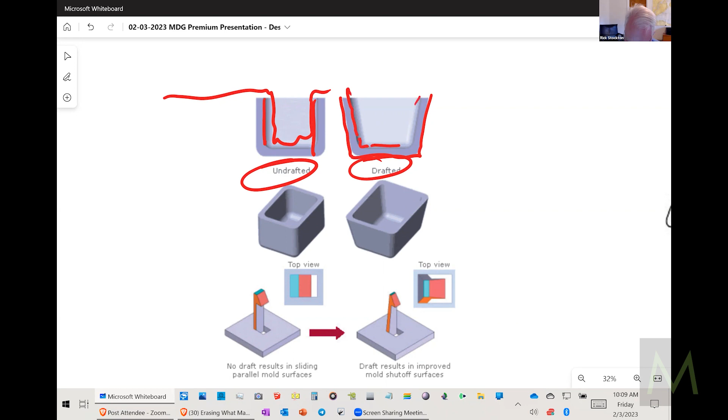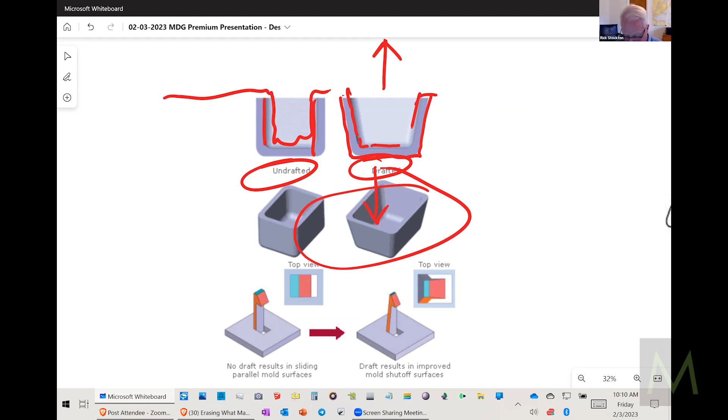And that makes it really easy to just fall out of the mold. The top part that's making your inside is made like this, so you separate—the top part of the mold goes this way and the bottom part goes this way. This little guy drops out, and it's terribly easy to explain.

What we started running into, though, were some more complicated situations. If you're looking at this, some of you will say, oh, you just have to do this. We understand we're changing an angle here, doing something here, something resultant there. There are even subtle changes going on down here, but you notice you still get pretty much the same thing—just a few little subtle changes.

Now their complication was they had layer after layer after layer of parts—one part had to fit into another part, which had to fit into another part, and so on. The problem was that by the time you started putting these little angles in, by the time you got to the one at the top, everything had changed. So we had to do a lot of subtle little design work, and it's all geometry.

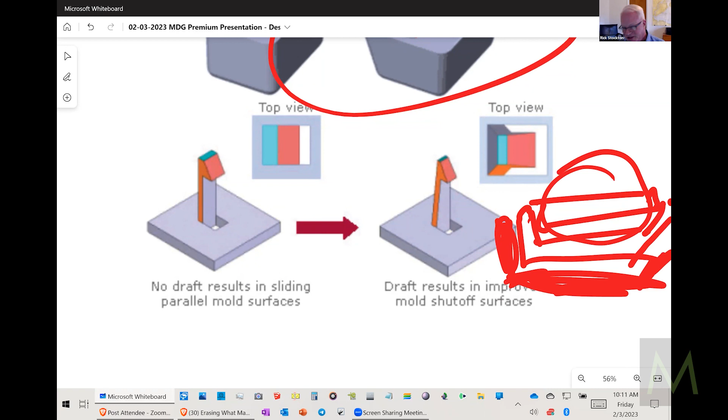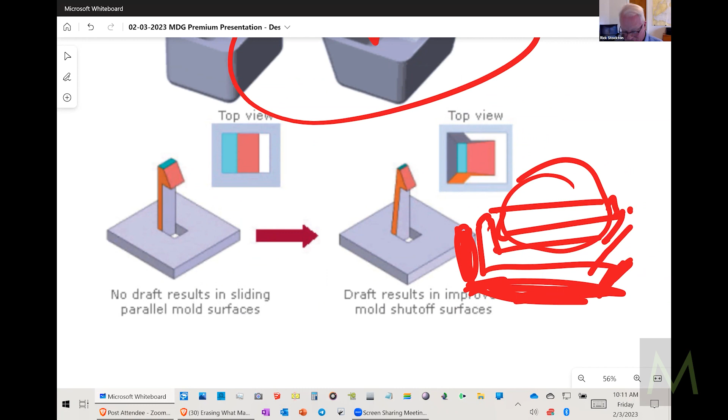Even though calculus is still pretty opaque to me, geometry and trigonometry and algebra—that's just what I did. If you have those tools, this stuff becomes a snap. And if you have 3D technology, it actually gets fun.

We used to have all this stuff to do. So these are the kind of things—this is the simple explanation for what these guys are running into. What I'd like to do now is take a quick walk through some of the disciplines you're all involved in, and how design for manufacturability looks from your view.

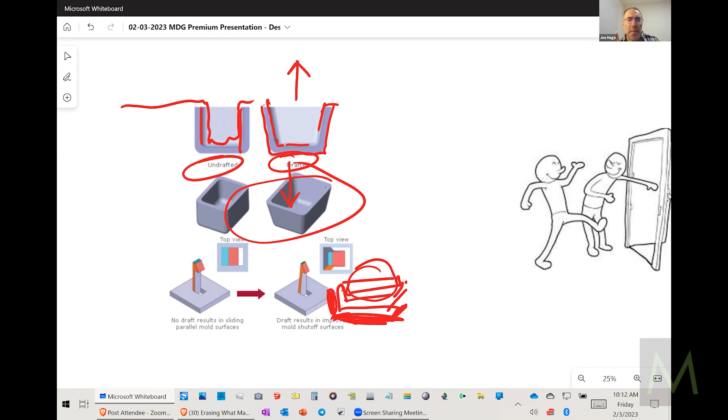Let me ask you, Rick—you started by saying no one would give a quote to work on what you just showed us, something that seems relatively simple? Well, the parts—they had a bunch of parts maybe a foot long, and the framework might look something like this. And they all had to snap together, latch together, with little spring latches and hinges and things like that.

And they had all this stuff going on, and the individual parts all had these straight sides everywhere. You couldn't—if this was like the cross section of a piece that was going along like this—

Is your point that had they made the change you show on the right, they would have gotten quotes? Yes, and actually we did make those changes and they did get quotes. Oh, okay, I didn't catch that entirely—now I understand, it was a simple fix if they understood.

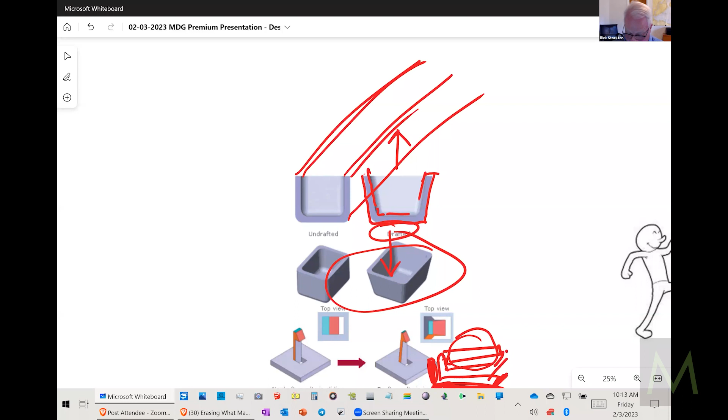This is why, as many of you as want, keep your mics on—unless you've got a dog barking in the background. Then I'll want to meet your dog, and I'll get completely lost track of what I'm thinking about. But it was tiny little changes like this.

You'd be amazed—sometimes it can be a change of material, sometimes something else. Imagine if you had a piece that had to snap into, let's say, this design, and then another piece that had to snap into this piece, and another piece that had to snap into that one—sort of a Russian nesting doll situation.

And you had to change this one—well, it wouldn't fit the one that has to snap into it anymore, and the other one would be even worse. By the time you got to the fourth layer, the latch or the thing you stick over it all, everything's completely gone. It's like the telephone game, where you whisper something in someone's ear but don't quite get it right, and then that guy whispers it into the next guy's ear.

Then he whispers it in her ear, and they all get it wrong. By the time you're done, God knows what you're going to end up with.

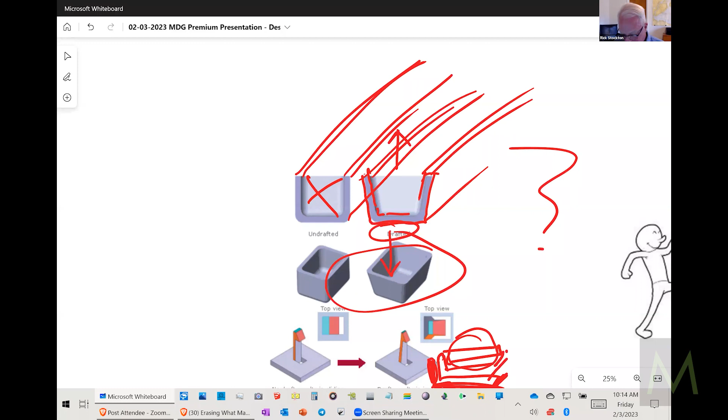All right, take us through that door. This door is into the weird door of how things go on. You get out into a manufacturing line, and it almost looks like somebody got up in the morning and decided they were going to completely ruin things. But nobody does. Everybody gets up in the morning trying to make the world a better place, trying to make it all work, wanting to make a contribution. Everybody wants to be the hero, and everybody should be. However,

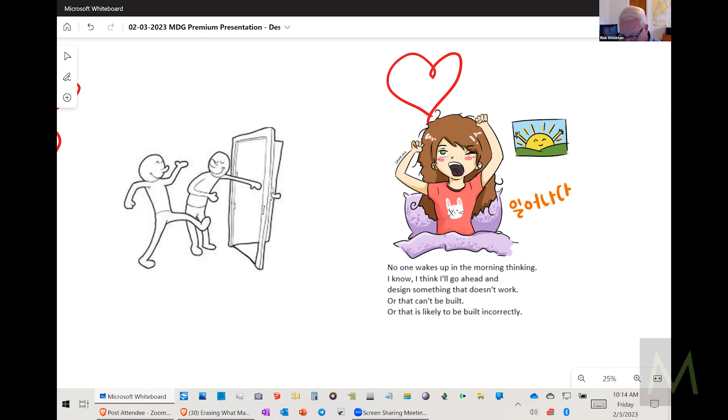Sometimes things don't go right, and sometimes the effort put into a design goes wrong. Elon Musk remarked one time that most of the effort put into one of his rockets was in manufacturing. I caught this on LinkedIn, and it was a big thing, everybody arguing, and all the designers like me are going, 'Oh no, it's really the design.' The answer is it's both, but he's absolutely right.

The art of making things work is actually all in the manufacturing. So if you're on the design end of things, it gives you an obligation, not just to make things work, but to make them likely to work, not just to make sure they can be assembled, but to make them likely to be assembled. Now you're thinking not just in physics, but in statistics, and in human beings and how they work.

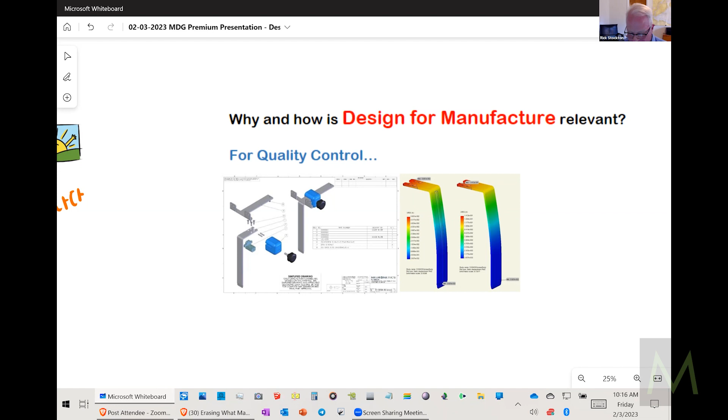For quality control, this is a very simple drawing. If your drawings are laid out in such a way that anything's unclear, that you've got dimensions that can't be measured in the real universe, and you've got things that... actually I would have thought of it if I could have, but I missed it.

We actually had a pacemaker can—it was actually a neurostimulator—but what we had was they very cleverly laid it out, and okay, it's nice and flat. So the way it was laid out in the drawing is a radius, and a radius, and a little one here, big one here. Again, this is all in the area of drawings and how being able to communicate at the beginning helps people at the end.

It just so happened that the guy who was installing our optical gauges was hanging out with us, installing something new. We were showing him this and how we couldn't measure it twice and get the same exact reading every single time. And we couldn't—everything was different every time you measured it. He looked at it, scratched his head, and said, 'Well, of course it's not going to work. You're going to get a different measurement every time.' And we said, why in the world is that?

In our world of linear thinking, you just kind of want to go, well, if you measure it, of course you'll get the measurement. He said, because it's impossible. Whether you're using touch or optical, you're getting a series of readings, and no matter how close they get, they're going to be a little different every time, giving you a different result, a different calculation. He said, you have to go at least two-thirds around a circle to get something that's consistent. I said, no way. He said, way. So I said, show me the math. And he sent it to me.

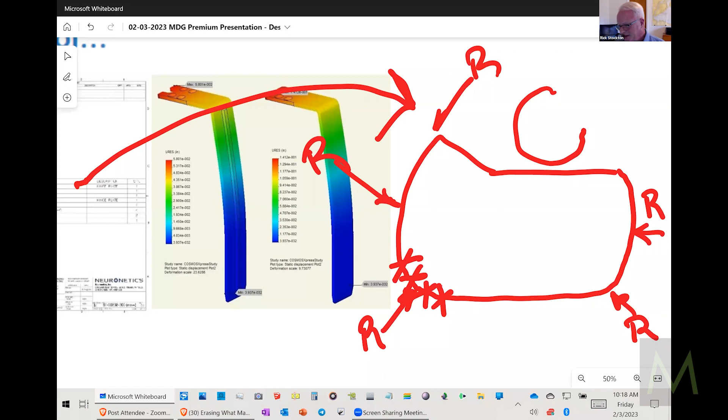The man was right. But the guy doing the drawing, if this radius was important and he's designing this part, just labels it like a radius—he says this is the radius of 0.060 inches or something like that. It's useless; no one can measure it. This affects quality, and if you're not designing well, it affects quality control. Quality control basically had to resort to making a bunch of these cans, test fitting them together, and pronouncing it okay.

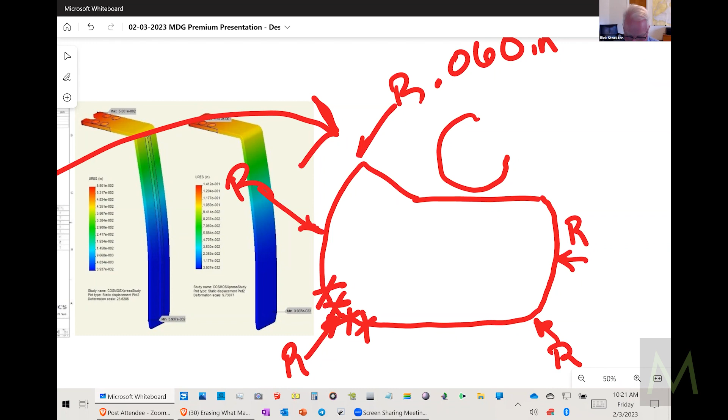If you've been doing this for a while, I'm going to give away my age. When I started learning to draft in 10th grade, for years and years, the standard of drawings was pencil and maybe ink. Our idea of automating an assembly was making a Xerox copy of it on transparent paper and then taping it right next to it. That's what we did, that was cut and paste. We did that for years and years. Then I sent myself back off to school to learn CAD, and I joined a company where they were going to teach me what I didn't know. That was our standard. There was a lot of stuff that was so hard to do if you didn't have CAD that it wasn't worth designing.

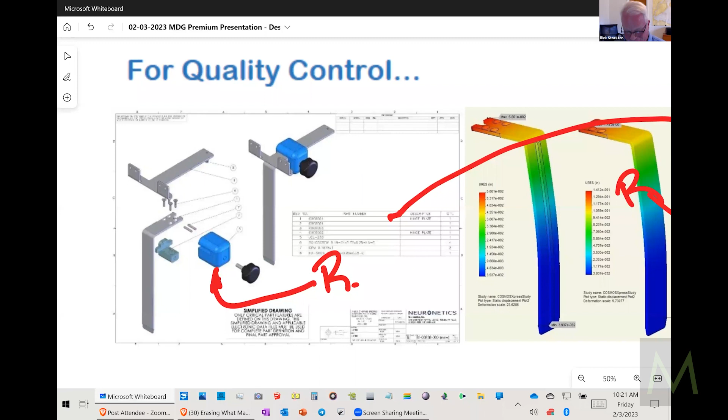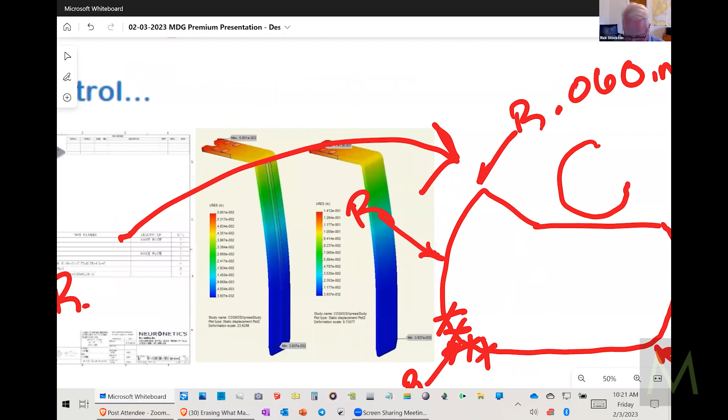But we had to use a lot of imagination back when there was pencil. You also have to do that, as you guys just pointed out, when you're working with something where you can design impossible things. And the big issue with us designers is that we design impossible things. Even in packaging, I get weird things where I might have heat or radiation exposure, and that changes my tolerances and fits, and I have to account for that. You're not going to get that in a 3D printed item either.

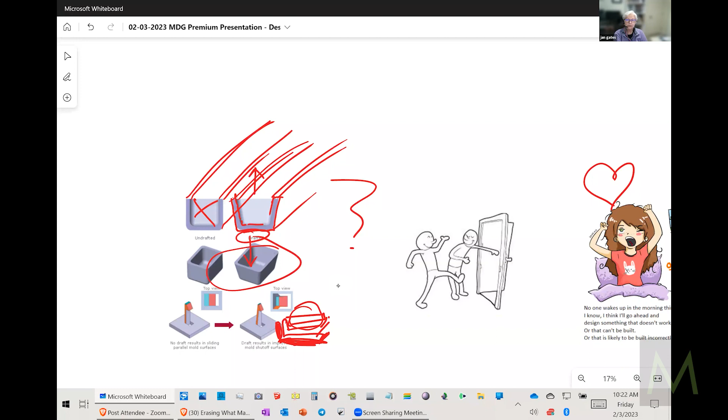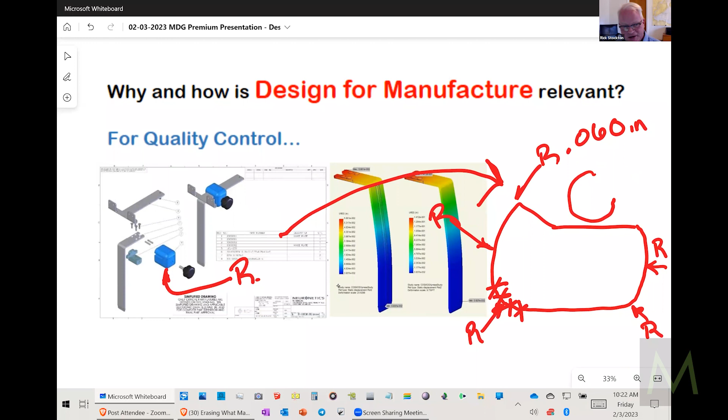So it makes it fun. Not only that, but skill levels vary among CAD designers. I remember one time, half for fun but also because we had an application, I actually made a CAD design of a Ziploc bag with the flexibility, because we needed to portray something photographically, so it's got open and closed and various things like that. But even when you've got all the skill that you need, if you're not pretty much seeing in 4 or 5 dimensions at once, you're gonna miss this stuff.

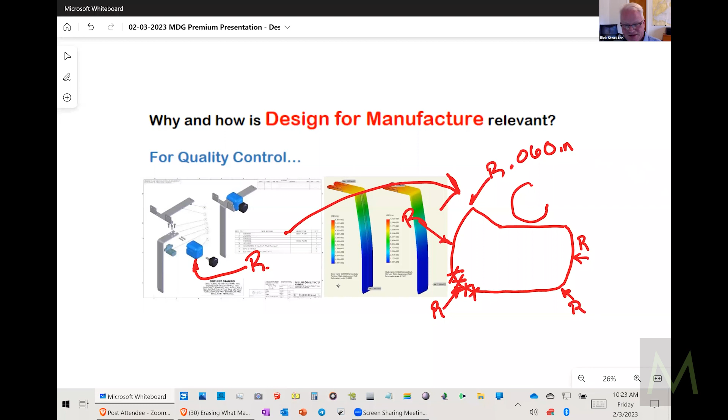So what does it look like? Luke, you had something to add?

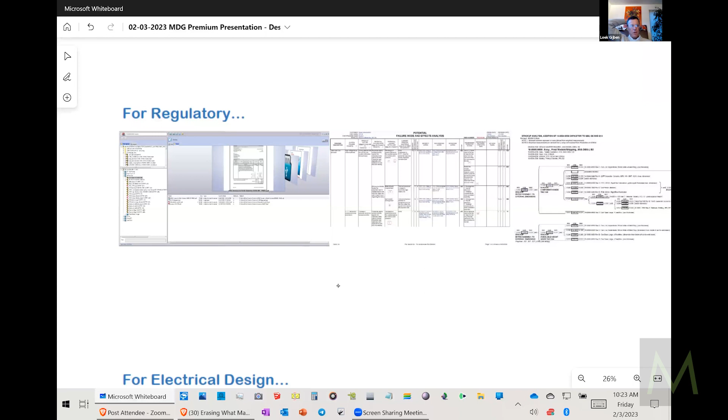Right now we're doing a process failure mode and effect analysis on the process of building a product together. It has 7 parts that have to be glued together, and it's almost impossible to validate because the work instruction says you must have the right amount of glue, it mustn't go over the edge, and you must have enough glue that it sticks, but not too much that it will get in the way. The only way you can validate that is by qualifying the people who are doing it, so you teach them how to glue.

Absolutely. Nelly? So I actually have a client, and I won't name drop or anything, but they're doing 3D printing, and they're like, well, to design and mold right now, it's just too costly.

We're going to go to clinical trials with 3D printing, and you haven't even considered how you're going to manufacture for the quantities you might need. But they don't want to hear that because they've successfully gotten to a point where they can do the 510K with this. If you switch to molding, don't you have to do an update, because that's a major design change from 3D printing to molds? I totally understand designing for manufacturability, because when I question them on processes, they're always like, well, this works right now. And I'm like, yeah, but have you worked in a manufacturing environment? Do you know what that's going to be? I worked for a company where the cost of manufacturing the device was so high that by the time they shipped it, we weren't making money, and we hadn't even paid sales commission yet. You've got to consider those steps.

If they make a change to the design that's significant enough, they'll have to redo their whole clinical study too. They always ask, what version did you do your clinical study with, and then look for reasons why you need to repeat it.

I actually have a client who is shipping product with 3D printed components in it, which I told them wasn't good. So now they're in a redesign, and we're designing all those parts out of 3D printing, because this isn't my specialty.

So are you suggesting that 3D printing has too much tolerance or variance and can't be relied upon? Or, in the spirit of today's talk about design for manufacturability, are 3D printers being used to mass produce anything, or is it more like a design tool? I see it more as a design tool. There are certainly cases where 3D printed parts are final parts, but again, they have to be validated, proven to have repeatability and all those things. Most 3D printing systems aren't really designed for that.

I think it is possible, of course, and there are situations, like in aerospace, where they do certain complex duct work, but that's very much controlled. Each part is tagged, labeled, and validated. So it's not like that in a medical device. As a general rule, I'm sure there are exceptions, but your standard 3D printed plastic parts are just problematic.

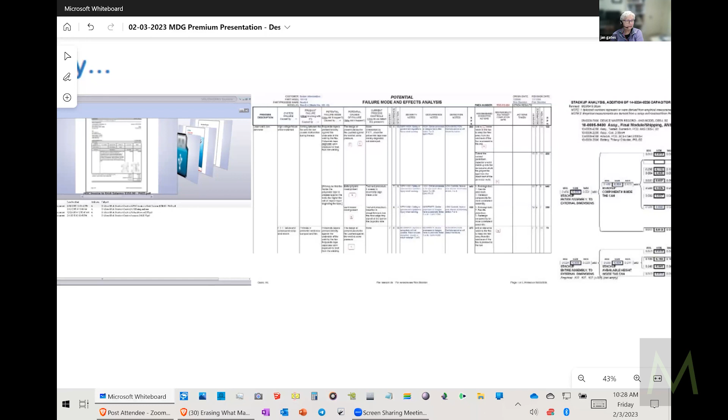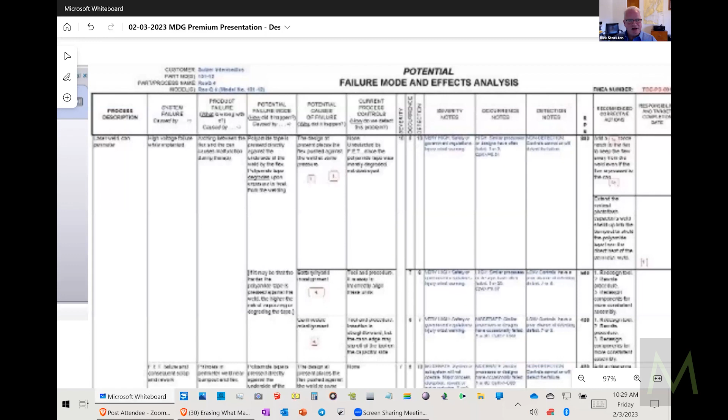The interesting thing about that is Luke was getting into this. When you're doing FMEAs, the whole process of evaluating how a process is going to go depends on what that process is. If we're used to talking about drilling or turning down metal, or even injection molding, and now we're talking about another process, which is additive manufacturing, our old 3D printing, that's going to have some different considerations, and the whole process changes based on that.

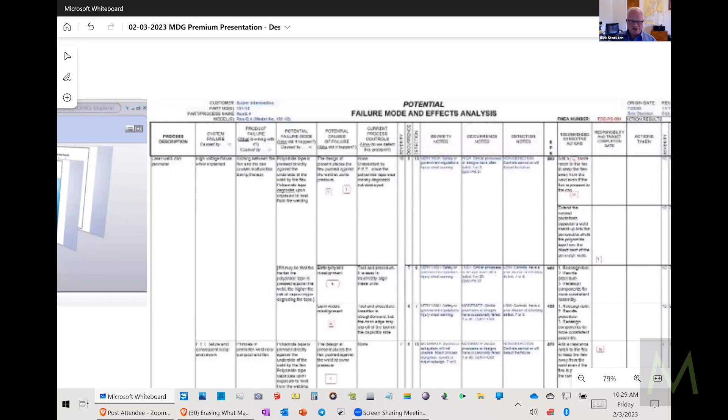I was brought in for a few weeks one time because an automotive accessory company was trying to put an FMEA together, and they had their 17 most technically expensive people in a room for hours every day, and it was miserable, like torture. So what I did is I came in, asked them a million questions, went home and did that much of the FMEA, came back and did it again. In 3 weeks we were done. It was only an hour, twice a week, and we got it done.

But the thing is, if you're not doing this kind of evaluation, you can easily run into something similar to that situation.

And how does design for manufacturability affect that? All kinds of things - even the ability to maintain relationships between your parts and understand what's going to affect something else, to say, let's experiment with something else. Also the ability to do stack-up analysis easily. If doing a stack-up analysis is hard and time-consuming, if doing an FMEA or risk analysis is hard and time-consuming, it's a fantastic time to get help doing that.

But you guys are actually now getting 3 sections ahead, so I'll just throw this at you too. If I had a crowd of high schoolers, they'd still be texting each other. Anyway...

For electrical design - this is the very first thing I ever designed. It was a turn-of-the-century internal power source with capacitors and batteries and the whole nine yards for a left ventricular assist device, basically to keep somebody alive until they could get a heart, while still letting them run around, take showers, things like that.

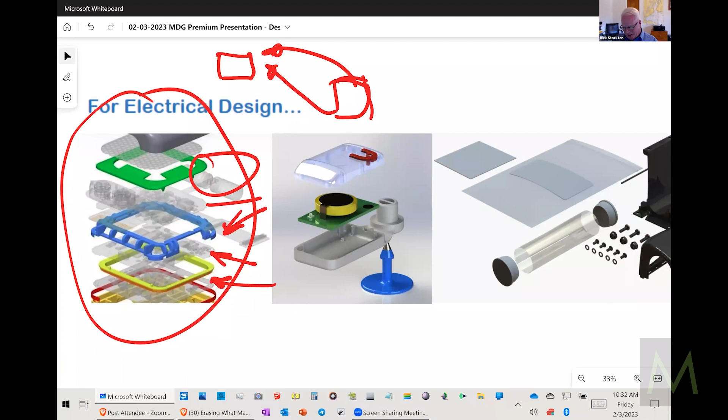If I do get a chance, I won't dwell on this, but I'll bring up something - if you were alive and watching the news in 1986, the entire world saw this disaster, but they didn't see the design for manufacturing failure embedded in it that caused the entire thing. Nobody has seen that part.

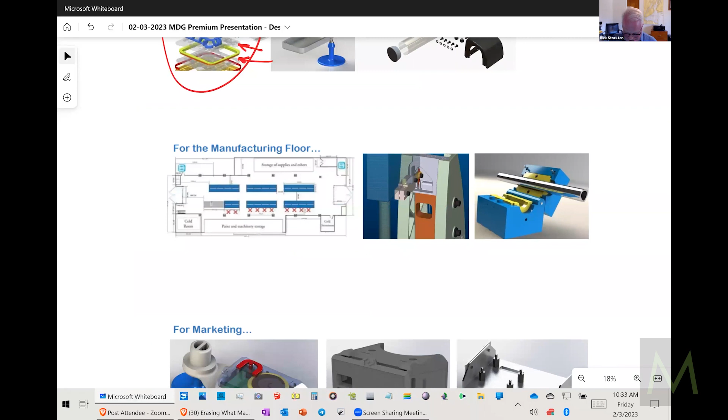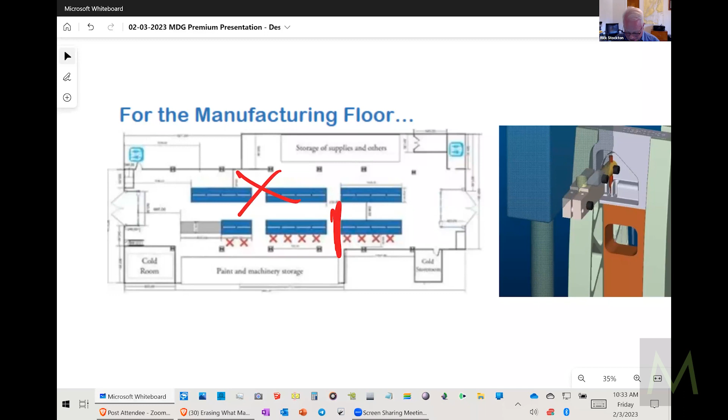So when it comes to your manufacturing floor, if you design something so that the build is logical, so it can only go together one way - the Japanese call that poka-yoke - it makes sense to put it together a certain way. It takes a bit of extra thought in the beginning, or design it so it won't go together unless it's correct, also poka-yoke. If you can do that, you can avoid things getting stopped, destroyed, and reworked at various points along the production line. You can keep those kinds of problems from happening to you.

Michelle? Oh, go ahead. I'm having a little bit of PTSD here. My first recall ever was a combination of about every single thing that you've talked about, short of 3D printing, because it wasn't around then. Oh my God, we're not done.

But yeah, the parts were designed and the stacking tolerances were loose. They were supposed to be press fit parts that couldn't stay together. The drawing allowed flash at the mating surfaces. Then you take those two parts that are supposed to fit together and send them to the assembly line, and their solution, rather than fix the mating surfaces and the flash, was to put a fixture on the manufacturing line to check if the fit had locked or not.

And then, fast forward, they're trying to validate the mold in a new press. It's supposed to be a validation run of 8,000 parts, and they overran it by 28,000 to fill inventory and release them to build before the validation was complete. And then I have 28,000 resuscitators that fall apart in the field.

And then somebody in planning who had started this whole thing growing came into my office one day, and I was super stressed out, and I probably snapped at her, and she's like, you know, you used to be really easy to work with, Michelle.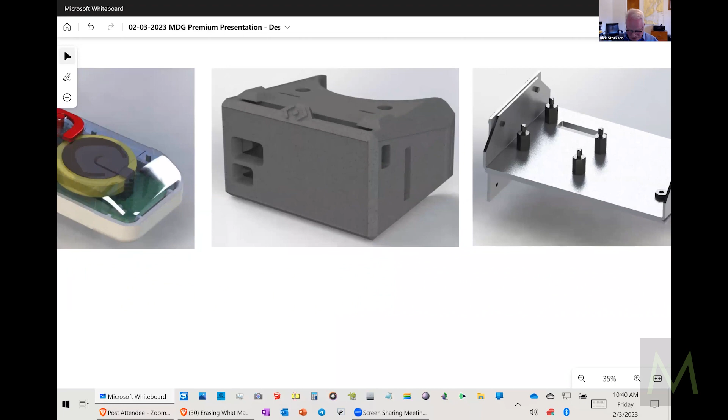However, it's also nice if you know how things are going to go together ahead of time. You can also make these great pictures of them that they can put in some of their things.

Purchasing, we looked at a little bit. And when you're looking at purchasing, it's just like, well, okay, so what's wrong with purchasing? You just sling it over the wall and the purchasing guy gets it. Well, what if the stuff you sling over the wall can't be built? What if it's unlikely to ever be built well?

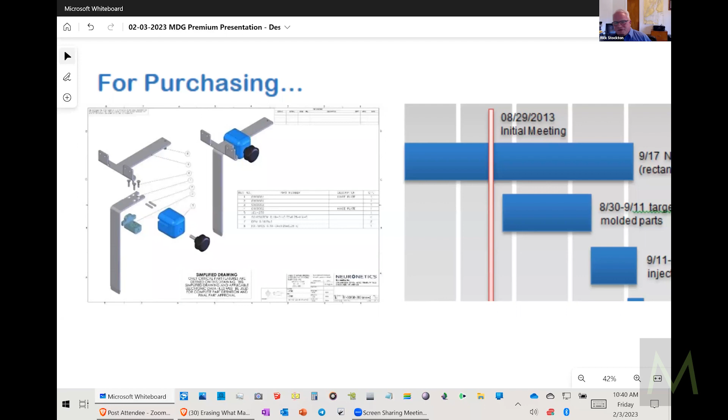What if you put a little more thought into it, you could have made it cost half as much, which means if it's a medical device, maybe more people will be able to get it in their insurance plans. What if you have something that can be made so inexpensive that it can be put on a credit card?

I know a guy in San Antonio who's doing it with the artificial hand. I've consulted with him for free because I love what he's doing. And he's doing one for a fraction of the cost of an artificial hand, and we're talking heat sensors and everything else. He's got it built in, and he's almost got it ready to go.

And what if you can do something? What if $10,000 of thought on the beginning end can save you $700 million of thought on the back end, and something that only could have gone to the very, very rich can now be afforded by anybody and can go on anyone's insurance plan. And that is like the goal.

I work on as many things as I possibly can that make sure that the thought goes into it so that things can get to everybody. I know we can't afford to give everybody the most expensive thing in the world, but what if we can put the thought into it to make as many things as possible affordable for everybody, even if they drive a bus, even if they dig holes for a living, even if they don't do highly technical things like all of us do.

But if you've seen production delays, you've seen things fall short, you've seen the manufacturing guys coming back saying we can't build this. What does that do to production schedules? If you want a reliable production schedule, put enough thought in beforehand into the design. Don't just be thinking in tolerances, be thinking in statistics. There are a lot of skills that are going to go into making sure that a lot of these things happen.

But I'm going to throw a specific out that doesn't have anything to do with medical devices, and you'll be going, how in the world is Rick going to stretch this out from this and turn it into a manufacturability issue? And of course, I'm going to talk about the Hyatt Regency walkway collapse.

Here's what I'm not going to cover. I'm not going to cover the hours that we talked about it in civil engineering, going through the mechanics of actually how it collapsed. I'm not going to do it. I'm going to show you some pictures, no dead bodies, but it was a disaster.

You can see here, there was a sky bridge held up by cables like this, basically big steel bars. Okay, now, spoiler alert, the steel bars were strong enough. Other spoiler alert, that even though they did 1,000 things wrong, the design was strong enough.

So how'd this happen? How'd they fall down during a dance and kill hundreds of people and produce the second biggest life loss disaster in the United States in 1981, which we all got analyzed like crazy in civil engineering in 1982 and 1983.

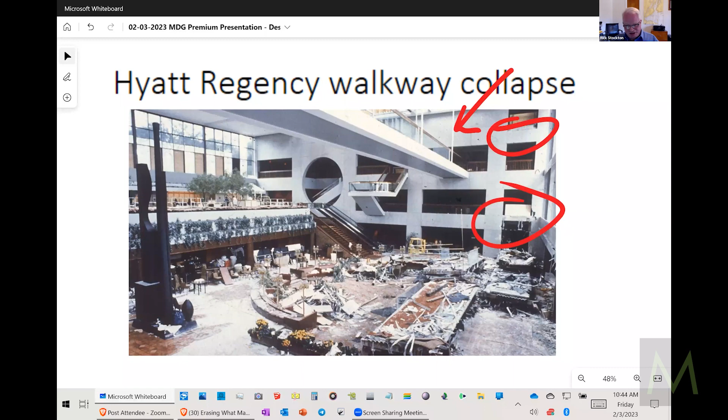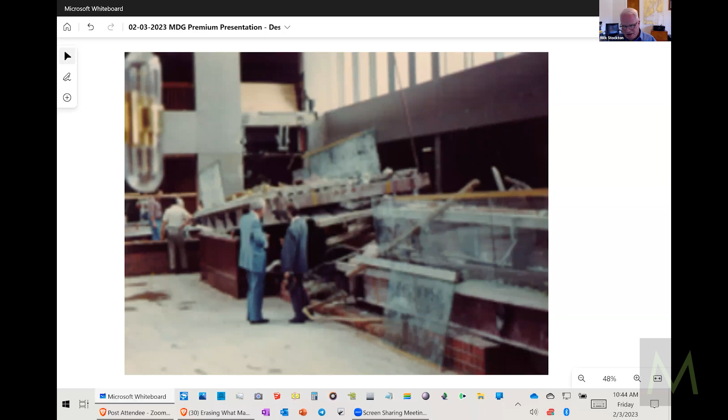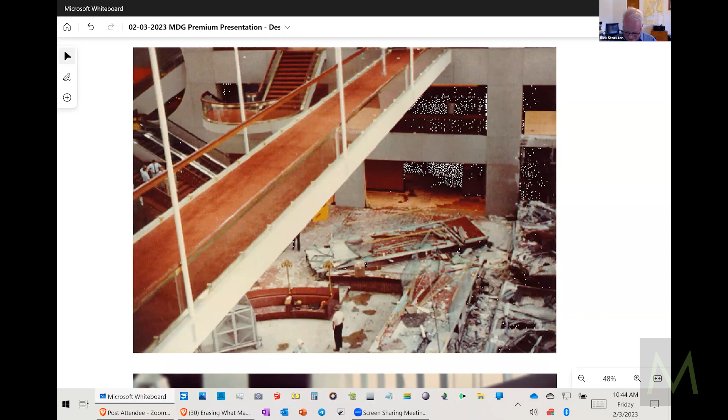It was just a disaster. This is when it was all working. You can see these huge steel cables hanging down. Here's somebody walking across. It was perfectly secure. Here was another one. So we have, starting from the bottom, 1, 2, and there's the third one.

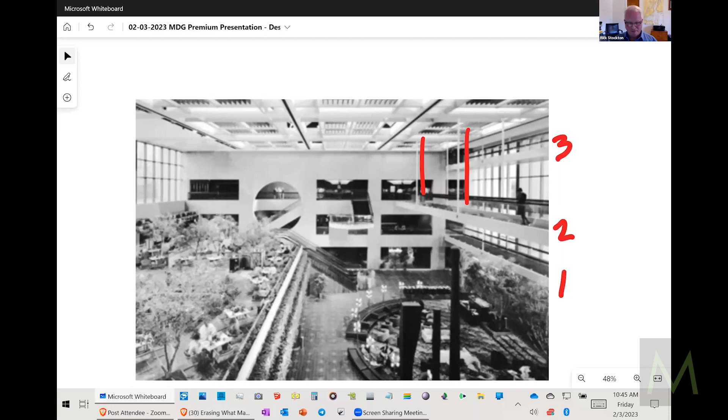I'm also not going to get into all of the different things they did wrong. They had design changes going around as handwritten notes, phone calls, word of mouth, no design changes, no verification.

Anybody who has heard me knows we all love to criticize bureaucracy. We all love to criticize paperwork. If we could just cut the red tape, everything would be fine, everything would be great. Well, if you're going to cut the red tape, you better just get ready to be gone. Because the guy who was the head engineer designing this stuff spent the rest of his life, no one went to prison, but he spent the rest of his life touring the United States, trying to warn people about all of the horrible practices that went into this.

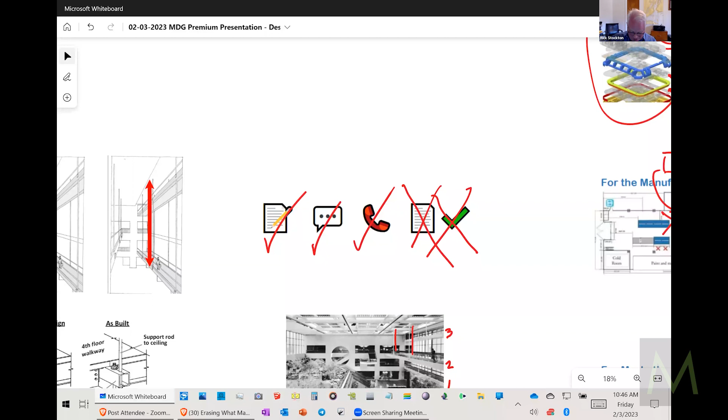So, again avoiding a bunch of detail, because we're going to get to the weird part that nobody saw. When they built this together, it was supposed to be a support that went all the way to the bottom. And again, real strong. What happened?

Well, this is all threaded. This is all threaded material before it's covered up and looks all smooth. But it's all like a gigantic all thread, the biggest all thread you ever saw, right? And these are all secured by nuts, which were also strong enough, into plates, which were also strong enough. They looked like they were probably designed with a safety factor of 2 or 3, but oh well.

Anyway, they went all the way up here, and somebody said, do you know how long it's going to take? Because nuts were going to have to go here. They said, do you know how long we're going to be screwing to get these nuts screwed all the way up to here for like 20 different supports? It's going to take forever. It's going to slow the project down. We're going to lose efficiency. And I'm all for efficiency.

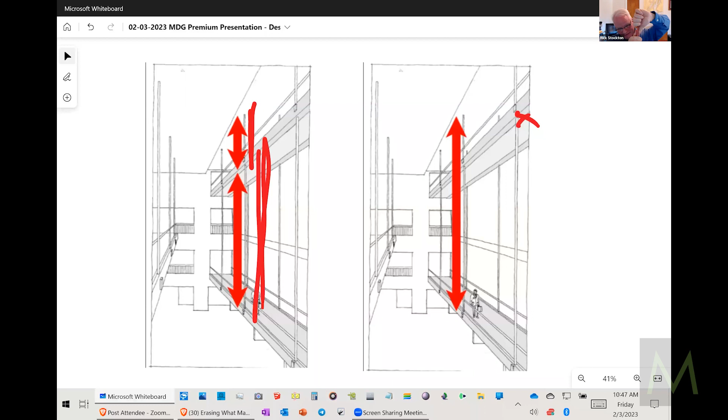But through a series of deviations from plan, they started doing it like this. They had one that was this long and one that was this long. And I could look at the last Aggie bonfire, and I am a proud Aggie, I suppose, but instead of having a single center pole on the fire, they didn't have a long enough tree, so they had 2, and they spliced it together. Where did they splice it together? Exactly in the weakest point of a supporting column, the center. And you'll just have to take my word on that if you didn't go through all the mechanical engineering classes.

And here's the close-up on what they did, and I'm just going to kind of zip right through it if I can. This was to plan. This was the way they did it. Now it was much more convenient. It was much more quick. They got to use shorter pieces, and it put exactly twice the strain on these welded box beams.

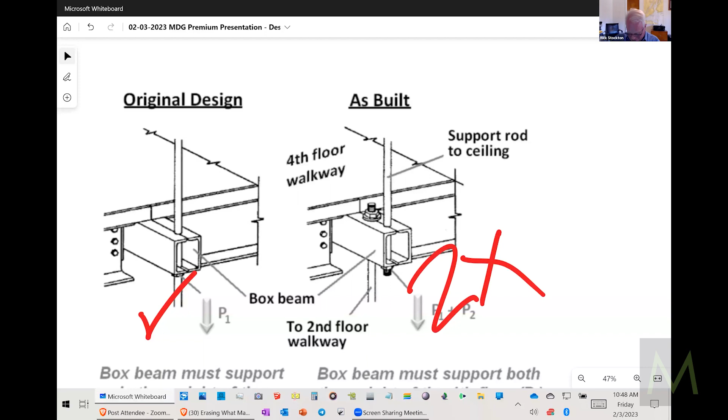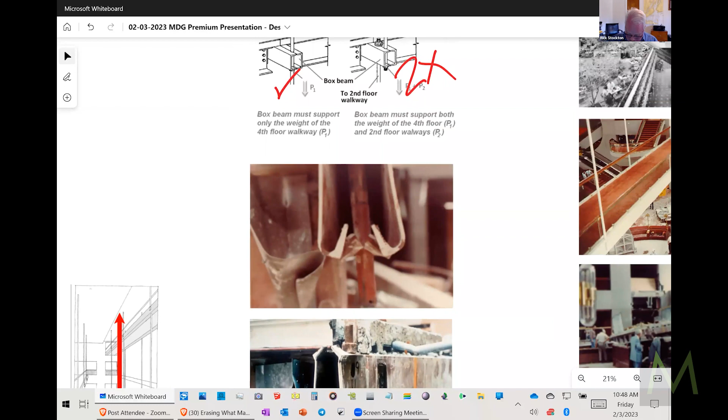Anyway, again, without getting into all that, this is what happened. It was a series of gunshot-like pops, and then everybody was dead. And here's, I just grabbed this from a reference manual. This is a giant piece of all thread.

Again, this diagram, which you've seen.

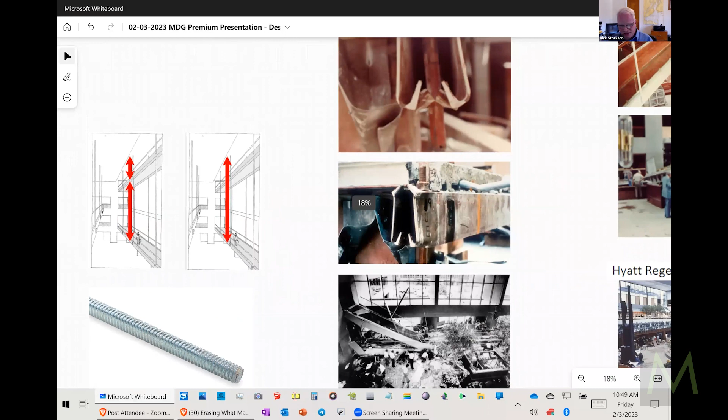I was watching with my wife, we watched Engineering Disasters, poor thing, and she likes it too. And so we watched that while we eat lunch at our house where I work.

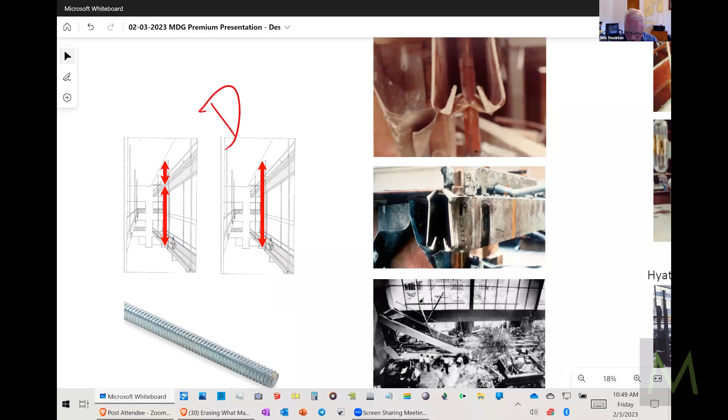I suddenly realized what had gone on. Now, all of these things happened. There was a series, you could write a book, and people have, on all of the different wrong practices that resulted in this. But remember, this thing today, we're on design for manufacturability.

So what do you suppose a guy like me was thinking? I was looking at it and going, okay, so he designs this brilliant design, the engineering numbers work, and they do. And so he's got a big, long piece of all thread, huge piece of all thread, and they've got all this going on. And here's what he's not thinking: he's not thinking, I bet everybody will really be excited about spending an extra 2 days having lots of crews of people screwing those extra nuts onto the all thread.

So you're not thinking about how can it be built? If it can be built, what if it's built wrong? We're used to thinking about that. What we don't think about is human beings and statistics. We don't think about how it's likely to be built. What do we think is going to happen if we throw an idea out here that all relies on people wanting to do this? What do we think is going to happen?

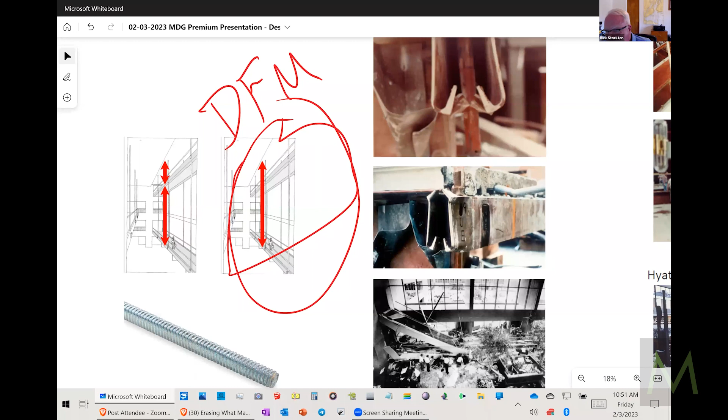So let's see, got one more illustration. These illustrations are pretty much all from US patents of one particular thing.

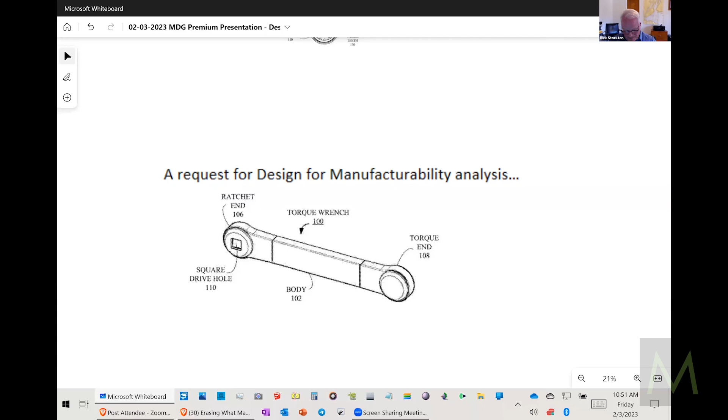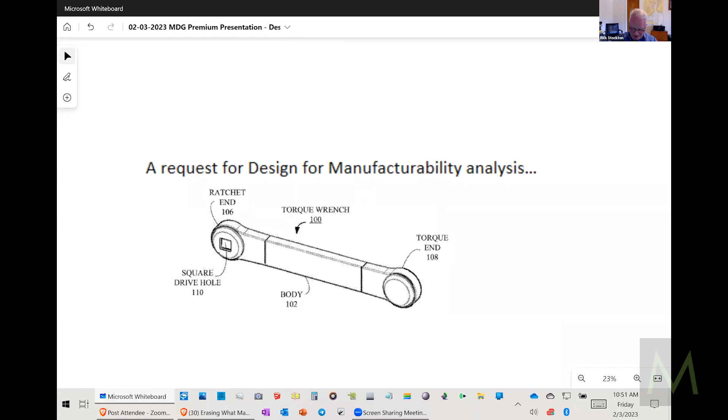I was called in to evaluate a little torque wrench, and they said, well, we've got this thing, it's great. We just want to do design for manufacturability assessment on it. And I took it apart, and the DFM report was not going to look great. But then I took it home and I found out it didn't work. So I ended up redesigning the thing, and in redesigning it, had to use all of these principles.

For a few dollars, instead of $500, I'll give you an idea of what we're replacing. A breakover torque wrench. And I told them flat out, 20% chance we won't succeed, we'll have nothing. You know, you pay me all this money, we won't get anything. But they were desperate. And we figured it out, or I figured it out.

And my name's really never on a patent, almost by rule, because I work for geniuses and I figure out how to make their ideas happen. So I'm sort of holding hands on one hand, genius, on another hand, manufacturing, production, fabrication guys. And I speak both languages. I can speak PhD and I can speak 8th grade, not a problem.

And I'll tell you a secret, some of these 8th graders are a whole lot smarter in many ways than some of the PhD people. So figured out a way to do it.

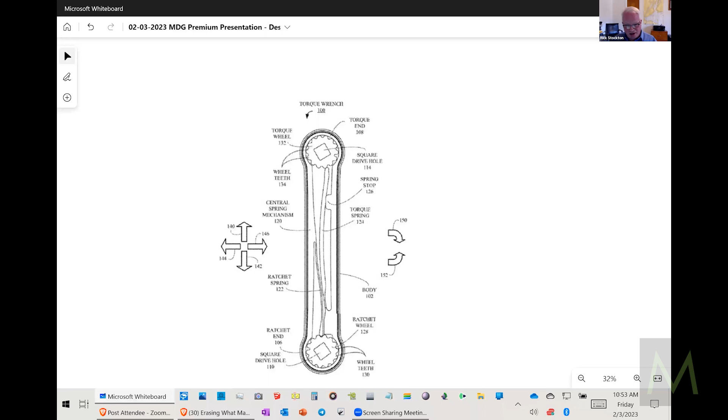But while we're doing this, a lot of people would go, well, what's the best theoretical way to do it? But I started with the processes that we could afford to make this thing for a few dollars. What could we afford to use? That narrowed it way down. What did that do? That changed the tolerances that we're going to be able to use to make it. Oh, okay, well, that's going to change a lot of things. But what it did, it sped up the process, which took months, to go through several designs and make sure that we could reproduce something like this.

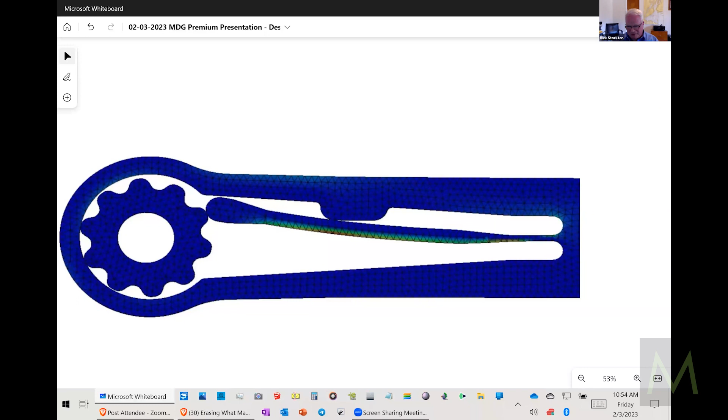It took some analysis, and I farmed some of it out. And by the way, I called Joe, and he recommended a metallurgist, she was fantastic. She not only knew the different metals that were more likely to do it, and we picked an odd stainless steel, but she also, now this isn't the design we use, this is just one of the finite element analysis, but she not only knew what had been invented, but she knew how likely it was that we'd be able to get some. She knew what was available. She had an idea of what the market was like. And so we didn't waste our time on unobtainium.

Ended up with something really simple. Still didn't have enough time. Called a friend of mine. He designed the plastic housing because I just didn't have time. I was doing the experiments on this, more stuff from the patent drawing.

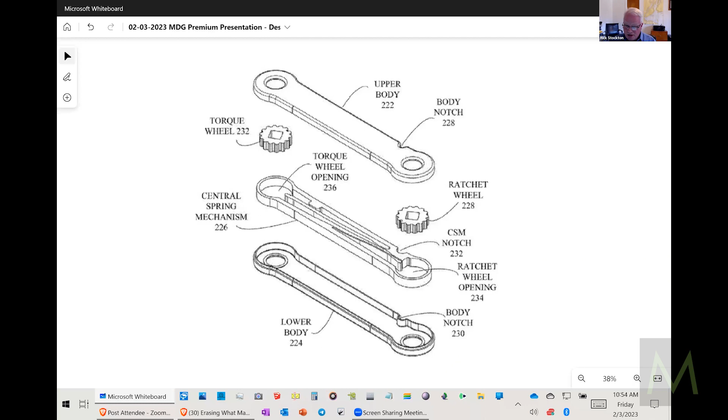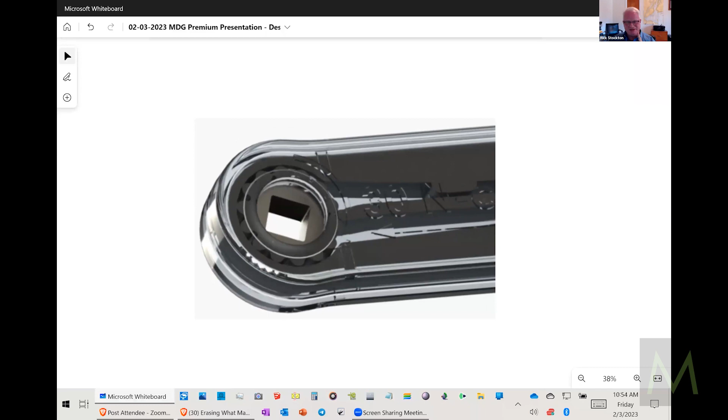And again, my name's on like 2 or 3 patents in the world because I usually don't have to do anything except figure out how to make things work. And if you're into DFM and you want to have your name on patents, you're going to be sad all your life. You're going to really be miserable because the geniuses that are hiring you have already figured it out. They already know what they're doing. They're just going, we have no idea how to make 2 of these things. We've got 1 and it works fantastic, but we don't know how to make 20,000 of these things.

So you can end up with something very pretty and very simple.

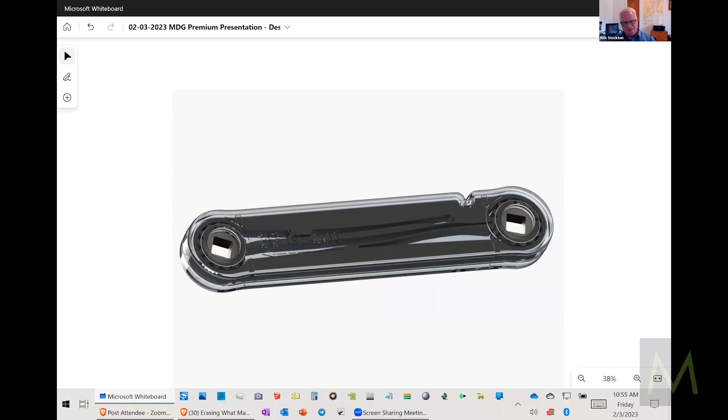If I had to show you the reams and reams of experiments and tests, and the different metals and titaniums we tried, and everything else we were doing, it would take forever. It took me months just to do all that stuff.

I hired all my children to help me do the experiments, and I hired another child to help me do the graphic design for something else. Every resource I had, I used.

It's a good thing you're so virile to have that much help. Well, I was virile enough to have 3.

Eddie Capabianca, you had something you wanted to ask or add? Hey Rick, that bit of the presentation about the bridge was really interesting. If you wanted a less lethal bridge example, are you familiar with the wobbly bridge here in the UK? It's a beautiful looking bridge that crosses the Thames.

Is it still up? Oh yeah, and it's still called the wobbly bridge even though it doesn't wobble anymore. They built this beautiful looking thing, but once they allowed people to walk across it, everyone ended up walking at the same pace, and it started wobbling. So they had to double the price of the bridge to put in dampeners. It doesn't wobble anymore, but it kept the name.